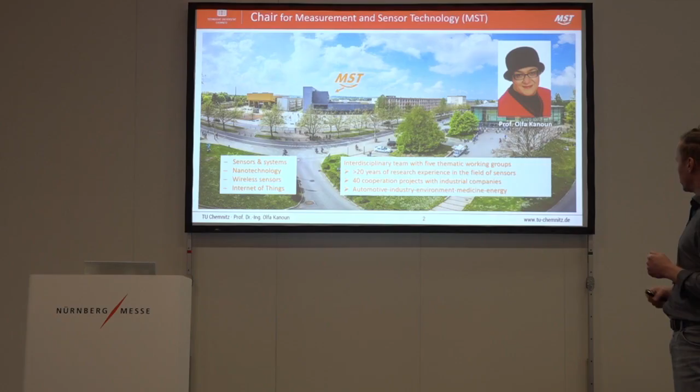But we always ask the question, how do you do it in detail? They spoke about software, they spoke about AI and so on, but which information do they use? And the answer always comes, I don't know. Our idea is to look into our capabilities. We are a university in Chemnitz, my chief is Professor Kanoun. We are dealing in the field of measurement and sensor technology, and we ask ourselves what we can contribute with our ideas and techniques to improve production processes in the sense of sustainability.

A short recap, we have 5 main working groups in our team, dealing with almost all aspects common in sensor technology. I want to speak about impedance spectroscopy, that's why no more details here. We are developing physical sensors, wireless sensor systems, electrochemical sensors, and if we combine everything, we are in the range of smart wearables. The covering technology is impedance spectroscopy, and in all these fields this measurement technique is more or less involved.

This is also the measurement technique for which we have hosted the International Workshop on Impedance Spectroscopy in Chemnitz for nearly 20 years now. This year we have the 18th run of this workshop. Okay.

Sustainability in manufacturing. I'm sure you are familiar with this background, the sustainable development goals provided by the United Nations. If we cut it down to the requirements of companies, we have intrinsic and extrinsic motivations. The intrinsic motivations are the scarcity of resources and energy, and energy is in most cases the question. Cost reduction, increasing quality, less rejects, supply chain problems, circular economy.

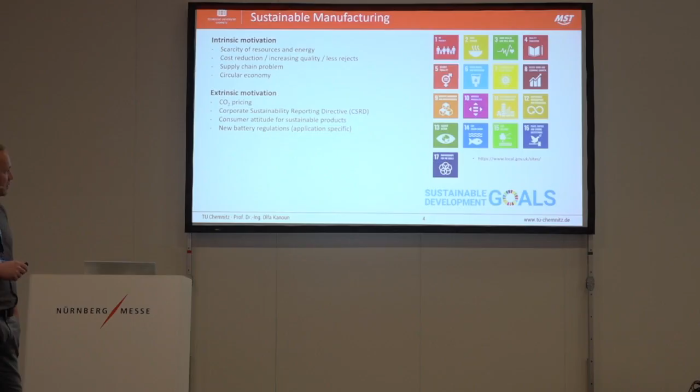Extrinsic ones, I don't want to go into each aspect in detail. I want to highlight the Corporate Sustainability Reporting Directive, the CSRD. This is a demand from the European Commission which causes more reporting in the future. We have a lot of reporting already, but this demand will come, and in a lot of cases the companies don't have measures in hand for this requirement. Focus: CO2 footprint optimization, energy and resource utilization. This is the motivation we were looking for.

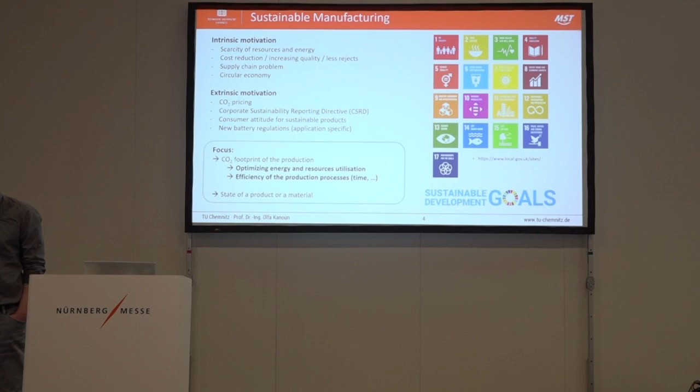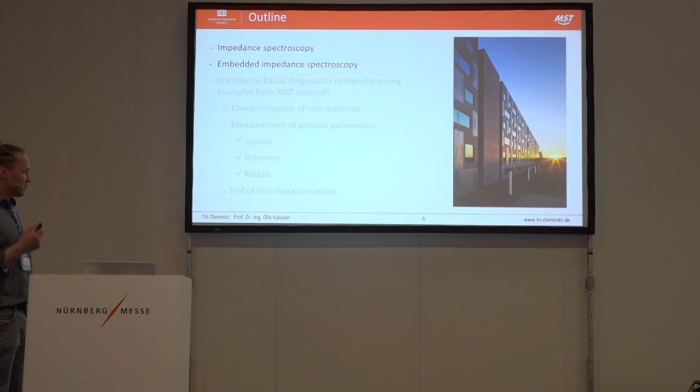And the question now is impedance spectroscopy: how can we contribute to support this process, to generate new or not accessible information in the production process to improve sustainability at all? And now, I'm sorry, I need a little bit of theory. I need to explain impedance spectroscopy a little. So I have some slides here, and I want to make it short.

Impedance spectroscopy is something from the field of system testing. I have an excitation signal. I apply this excitation signal to any kind of device under test. I get the output, I crunch both pieces of information, and I have a curve of the system, a UI curve.

The excitation signal is, in most cases in the theory, a sinusoidal signal with a certain frequency. We apply it in a working point, we get a response, and the output is at the end in this so-called Nyquist diagram, real part and imaginary part, one frequency point. This one, if I use one frequency.

Now we take care of this spectroscopy aspect. We are using multiple frequencies. I have multiple frequencies, I have multiple responses, and at the end such a characteristic curve, the so-called impedance spectrum, is born in this so-called Nyquist diagram.

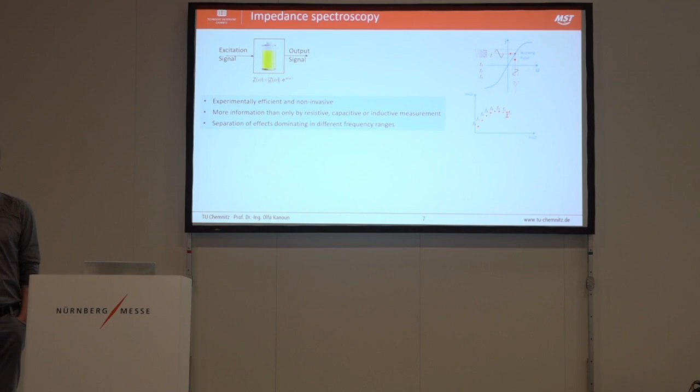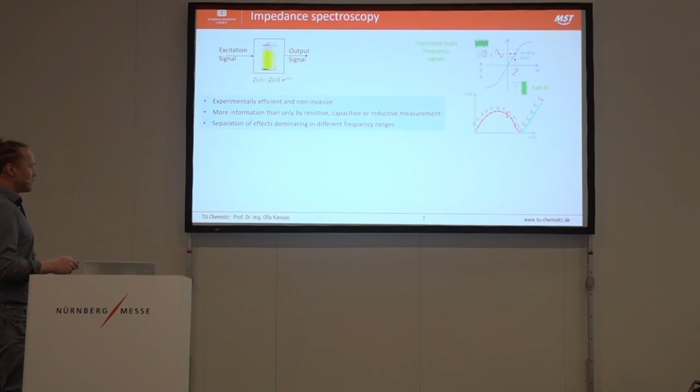And we can go also for the inductive one with coils. And this is, in our understanding, the inductive spectroscopy. So we have a huge palette of instruments for a lot of fancy things. Non-invasive, we can go resistive, capacitive, or inductive. And what is the strength of the approach? The separation of effects because of the frequency response. Later more.

At the end, we're dealing with this approach in a couple of different application fields, and I explain it always in that way, that everything that is surrounding us, this material, the air, this floor, or even a technical system has an electrical fingerprint, and this is this particular impedance characteristic. And we develop a method to analyze this fingerprint and to bring it out from the laboratory.

Impedance analyzers, maybe some of you are in charge, are costly devices, several 10,000 euros, and it is an approach in the lab. We need to transfer it to an embedded system to get it in a real-time process, in a production process. Okay.

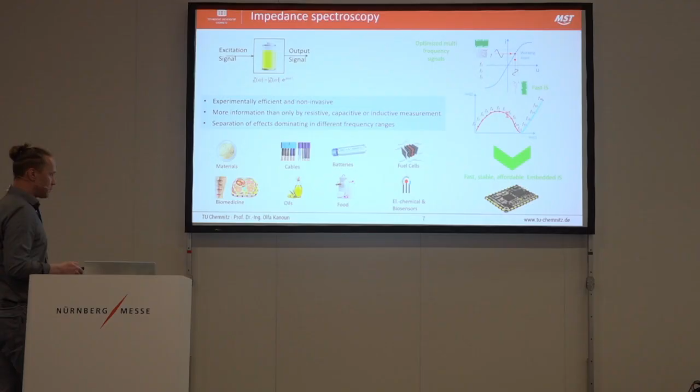Separation of effects. Now you see here also a theoretical impedance spectrum. It looks like a spectrum from a lithium-ion cell, and you see here different branches, and you see also frequency ranges. You see here millihertz and here kilohertz. This is the specific frequency range we need to apply for especially this application, for this battery system.

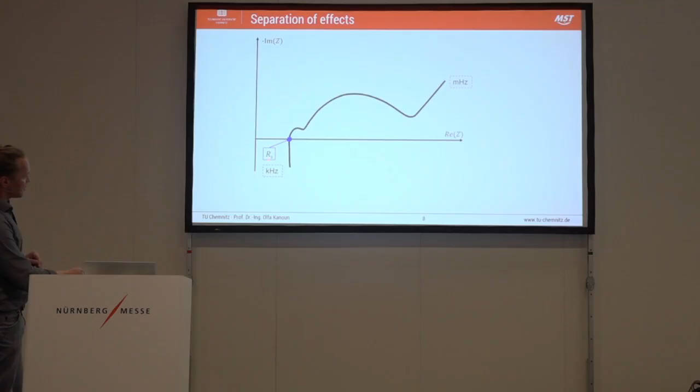And then separation of effects. We have here the so-called RS point. Not so really important. It is state of the art in the battery diagnosis, but really without any sense. Then you have here the so-called diffusion part. This is this almost linear line, and in this frequency range we describe electrochemical characteristics.

So you need to understand, if we go for millihertz, there is taking place a certain polarization of the huge molecules in the electrolyte. If you increase the frequency, the heavy weight of the molecule is too huge, and this part is going out of the signal that we measure, and another effect becomes dominant. And this is exactly this curve.

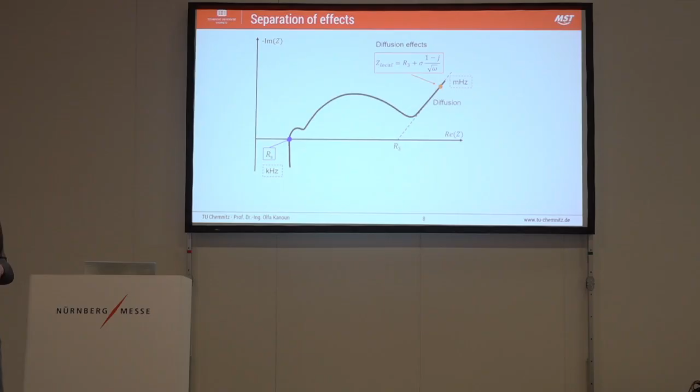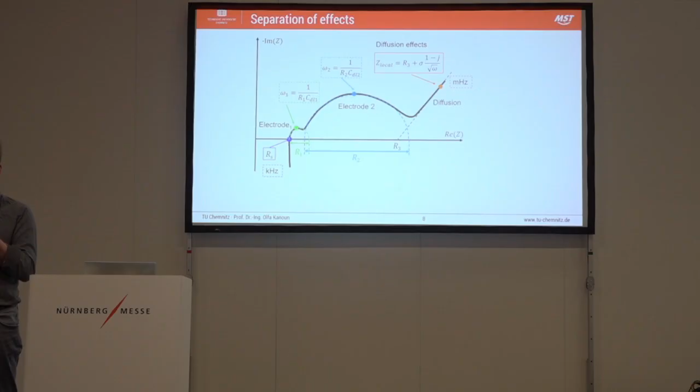The frequency reaches this point, the polarization of the molecules does not take place anymore, and then this curve occurs. This is the so-called electrode 2, and in these frequency ranges we can characterize the lamination of the electrodes, for example. So, I don't want to go so deep in detail, but this should illustrate we can choose a frequency range, and we can decide by choosing this frequency which effect we determine.

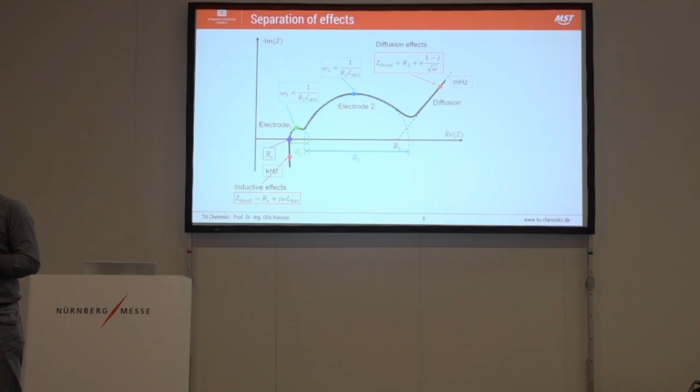And if you go in this range, we can take a look to the electrode 2, to the electrode 1, and here we have a small inductive part which we can use also to measure temperature inside of the battery cell. Okay. All these parts of the curve are well describable, and we call it a physical model, and this is always our understanding. We try to reach a physical model of our device under test.

We want to understand what is the reason for this behavior, and this is our most transparent example for this reason. I have here another German sentence. We have a qualitative and a quantitative analysis. For the qualitative one, we simply evaluate changes in the curve, and this is at the end the most simple approach. We measure the impedance spectrum at time x and the impedance spectrum at time y, and then we take a look, is there any kind of a change, without any understanding why?

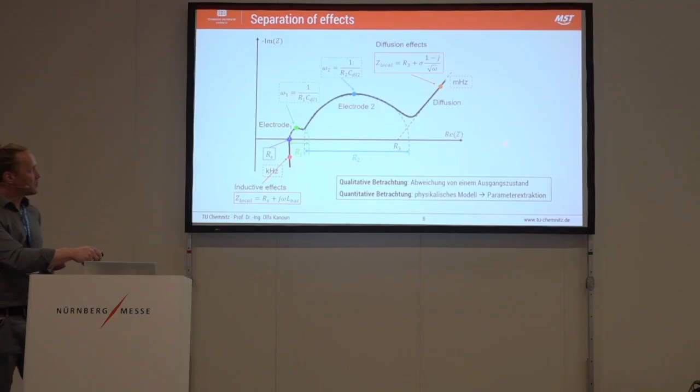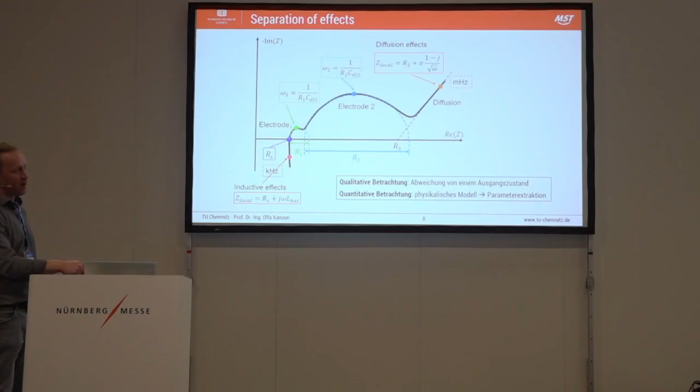The quantitative approach is exactly what you see here. We ask ourselves, what is the reason, or what is the physical or the electrochemical background of exactly this behavior? And then we have a physical model, and with this physical model, we can measure real physical quantities. So this is quick and dirty, and here we need a lot of time effort in our lab.

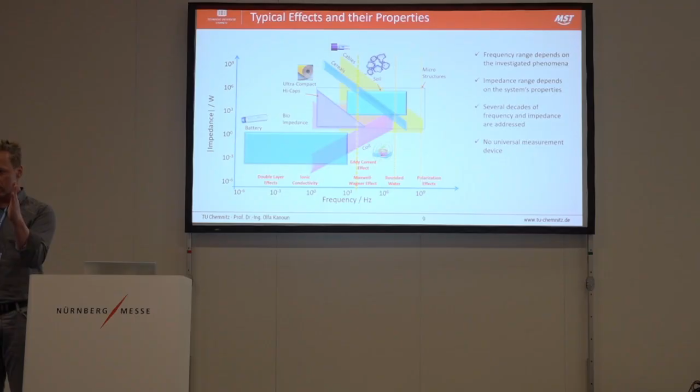So, what I was explaining now, you can see here on this slide. This is, let me say, the greatest IP of our chair. We asked ourselves, what happens between the electrodes when we make the impedance measurement? And what you can see here, for example, this is the battery again. You see here on the x-axis the frequency range from 10⁻⁶ to 10⁹, and here 10⁻⁶ to 10⁹. So this is a range of, let me say, theoretical impedances overall.

And over time, over our research, we developed this diagram showing which physical effects or characteristics take place at which frequency. And you see here the battery. It is in a low frequency range because the effects, the phenomena, are slow. And you know also, if you measure a battery, you speak about ohms, you speak about milliohms.

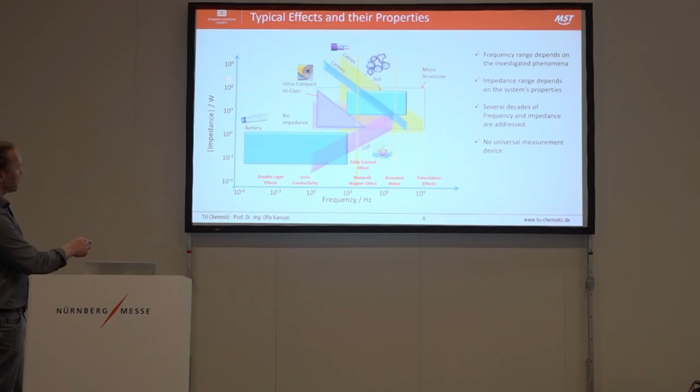If you go for soil, for example, you have much higher impedances, almost an isolator. And in that case, we need to increase the frequency. Then we need to go into the kilohertz, megahertz range. Right now, we want to continue with polarization effects in polymers. There we also need the gigahertz range. So, what else can you see here? The battery in this range, and here, for example, bound water.

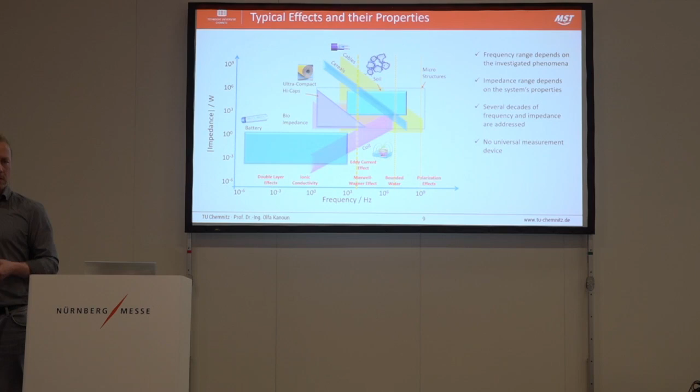I'm sure all of you have a microwave at home. What does a microwave do? Agitation of water molecules. And that's why everything that is somehow related to water, we agitate in this frequency range. If you speak about humidity in soil, humidity in wood, or whatever, we need exactly this range as the agitation signal. So, this is our methodology.

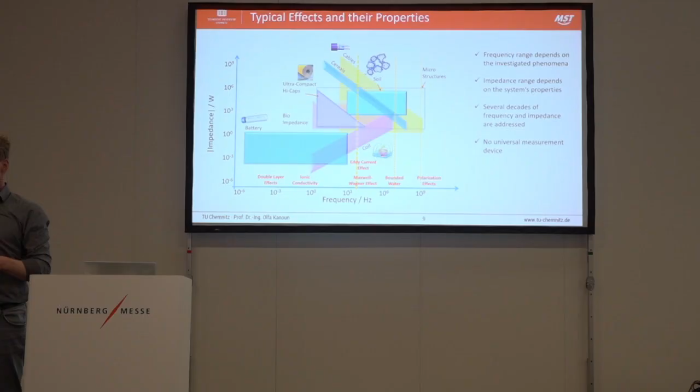We take a look at the device under test. I had a talk here with a colleague. He wants to know the aging process of a sensor. So I can't give a number, but if I understood what the aging process is in detail, which phenomenon is, maybe saturation of water in the substrate material, then I can define, okay, to analyze the aging of the sensor, I need a frequency like this. If I have a contribution of an electrolyte or electrochemical system, then I need to go down with the frequency.

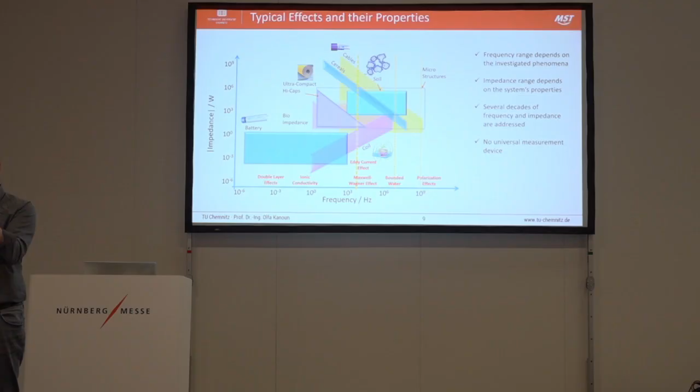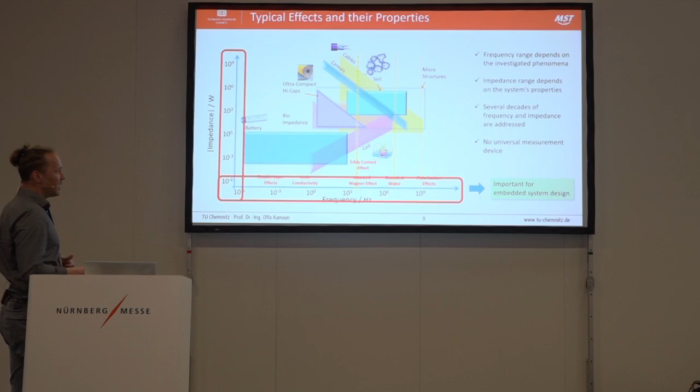And so this is our development process: we need to take a look at the device under test, at the question which is asked, and then we design exactly the required parameters for our embedded system design. To make it short, impedance spectroscopy is a measurement method in analytic labs. These are huge devices. You need to pay many thousands of euros. But our strength, our goal, is to bring it into a small electronic system, robust, fully automated, and also with limited resources. And how is it possible?

Let me say, it's a process. First of all, for sure, we need to understand the problem in the lab. Then, in the next step, we look for representative frequencies which help us generate the needed information. And at the end, maybe I need 2 or 3 frequency points which are sufficient to give me this answer. And with this little step, it is possible to reduce from this broad spectral analysis with a lot of data and a lot of measurement time to a small and tiny system which can be embedded in a process.

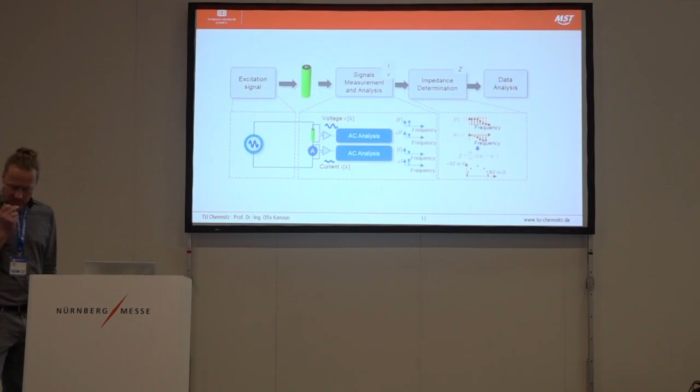In the meantime, we also have some references. We have a project with a company to detect counterfeit coins. And there we realized a system integrated into a system, and we can detect 500 coins per minute, in real time. Okay, here I guess is the last theoretical slide. Sorry for that, but it is important to understand the needed steps.

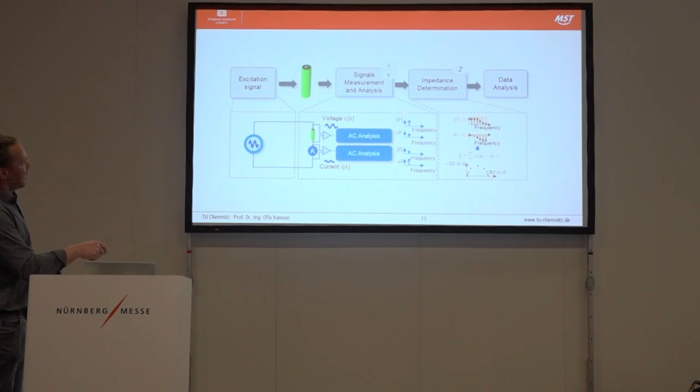As I said in the beginning, we need the excitation signal. So we need to design exactly this spectral information. We need to apply it to our device under test. Then we need to measure voltage and current. We need both. And here is also the problem: we need it in parallel. Because of phase shift, it's not possible to multiplex it to measure voltage and current. In the worst case, it works, but it's better if you can measure it really in parallel. And then we have the impedance determination and at the end the data analysis. Up until this point, it is hardware, and from here it is advanced signal processing. Okay.

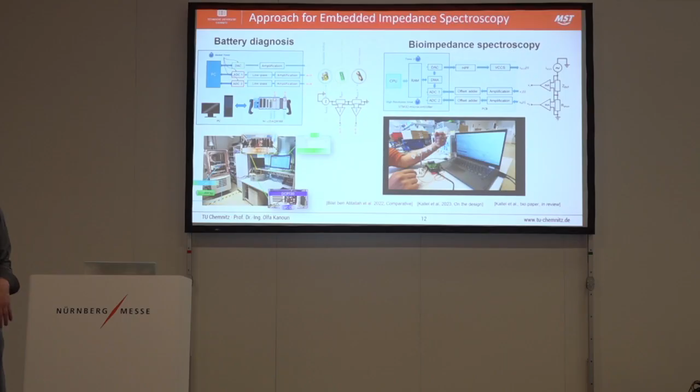Yes, we did it in a lot of different application fields. As I said, here you see our impedance battery lab with a climate chamber and our hardware. We do it also at the human body in bio and biomedical application fields. Only to give you an idea, we are dealing in a lot of different application fields.

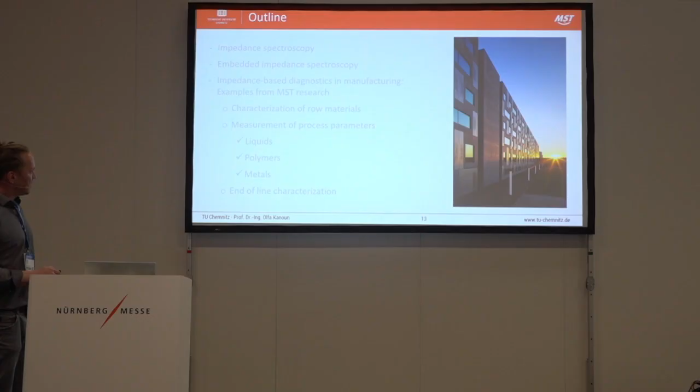But now, impedance-based diagnostics in manufacturing processes. So I need to hurry up a little bit. We have been dealing for maybe 20 years in this field, impedance spectroscopy. We are developing a lot of projects in this field. And some years ago, we asked ourselves where we are and what we want in the future.

Such an internal procedure, and we found out that we are dealing with almost all physical domains you need also in a production process. So this is an artificial one, yeah, for sure, here is not a real production process in the background, but what are included? Incoming goods. You have always in a production process things which are coming in.

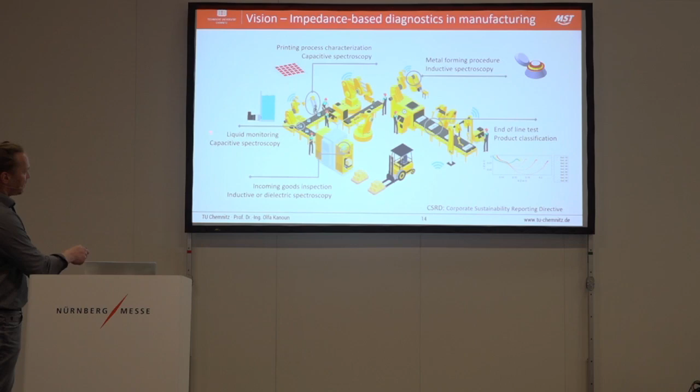You have to deal with liquids. If it is a color, a process water, or a jam, or in the food branch, whatever, milk. You have liquids. You have polymers. In a lot of companies, you have to deal with polymers. We have metal forming processes, combination processes, and at the end, you have end-of-line tests. This is so far our classification of typical branches.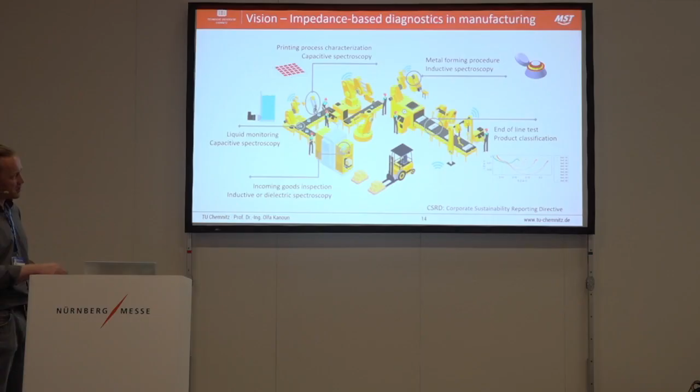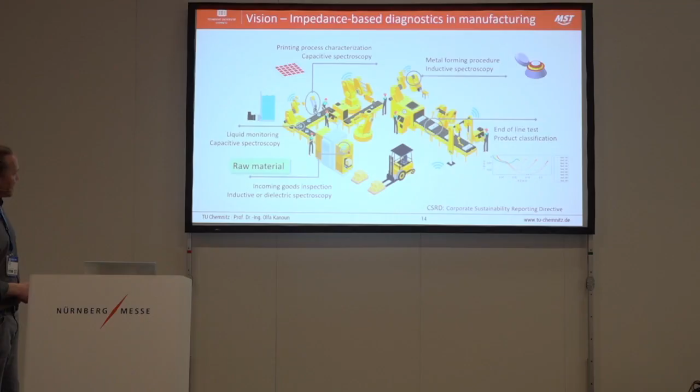And here it is written down. You need the CSRD, the Corporate Sustainability Reporting Directive. You need to explain, hello, I work on an almost CO2 reduced level. So now we go through the steps: raw material, liquids, polymers, metals, and products. And we start here in the incoming goods. So, sure, we are now a little bit in the future. And in the future,

if you take a look in the research, the question of recycling becomes more and more concrete. I don't want to speak about our automotive branch. They are really in charge of this, because until now, each exported car counts as 100% recycled. I don't speak more. They really have an issue now. So recycling becomes more and more an issue.

Also, supply chain. You see the problems with Corona. The supply chains don't exist. So maybe you need a second or a third supplier for your products. That means tolerances. Until now, you were a company and you say to your supplier, hello, I need this and this raw material within these tolerances. And if you cannot, then I go to another.

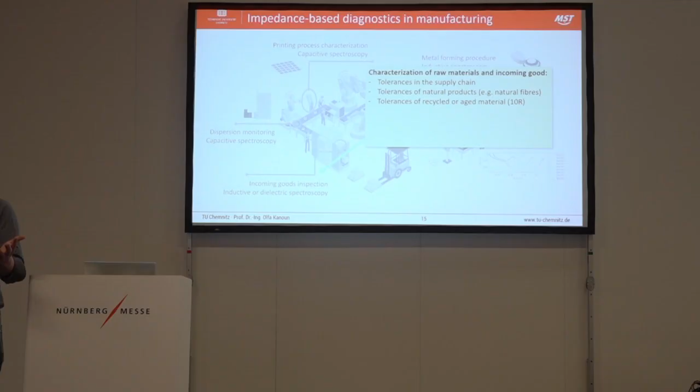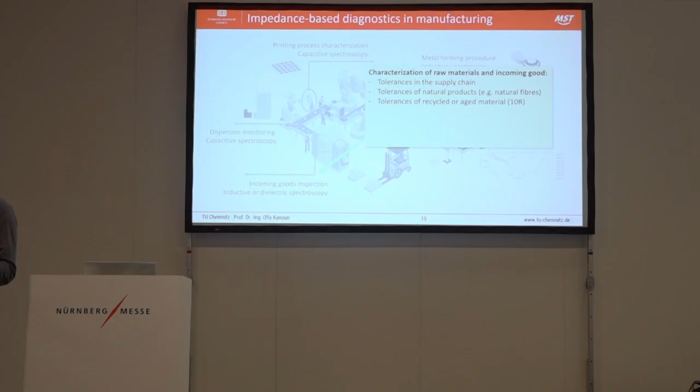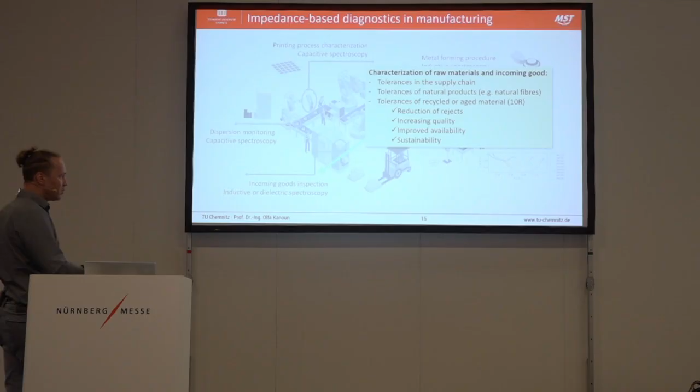But if we speak about recycling of material, you can't guarantee these tolerances anymore. Also, if you go for natural products, we are dealing in our team also with palm fibers, you don't have such strict tolerances anymore. So you need to deal with it. So even at this point in the incoming goods, you need more information. It will come. For controlling, reduction of rejects, increased quality, improved availability, sustainability at all. So you define in the beginning your process parameters.

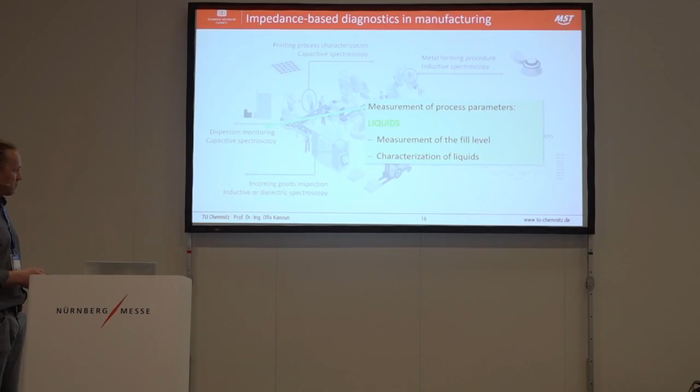Okay, let's go on. Liquids. You have fill levels. You have quality of your dispersions. You have sedimentation of particles, or you have evaporation processes in a tank or something like that. It's a problem, until now difficult to observe. We have here an example. It is from some years ago. It was a PhD in our team.

We have here a simple proximity sensor with a capacitive principle. And there's a tank with a viscous medium. So what is the problem? In this tank, is it the real level, or is it a conductive film at the wall? With a standard capacitive proximity sensor, you don't get this answer. We simply apply a few more frequencies, and we can distinguish between this conductive film and the real medium. Only as an example. If you are interested, we can discuss later.

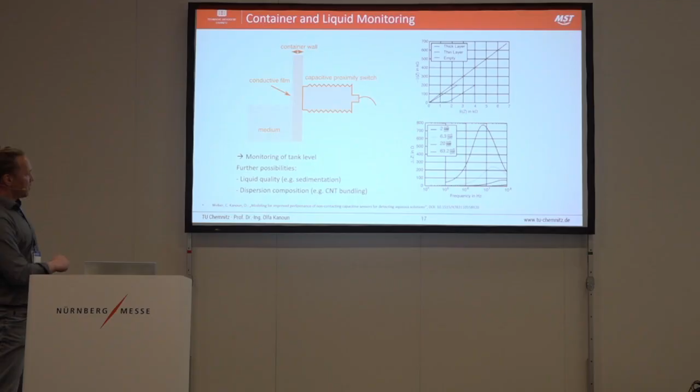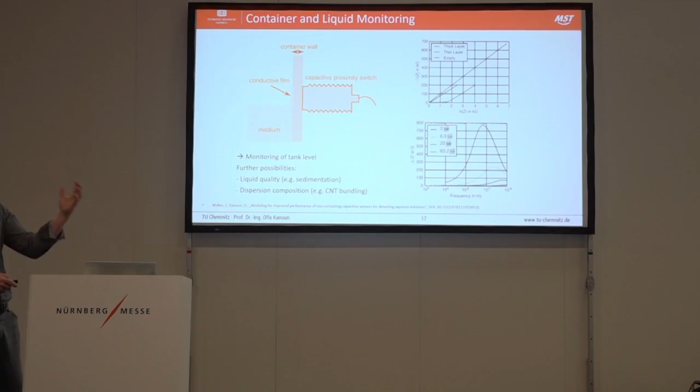Monitoring of tank level. Further possibilities. We also did liquid quality. We measure ion concentration in water. And for example, dispersion composition. Maybe someone knows us, we are developing also polymer sensors. We are dealing with CNT dispersions. We characterize our CNT dispersions also with impedance spectroscopy. There are a lot of applications and questions which we can solve with impedance spectroscopy, simply with this multispectral approach. We continue with the polymers. Wow.

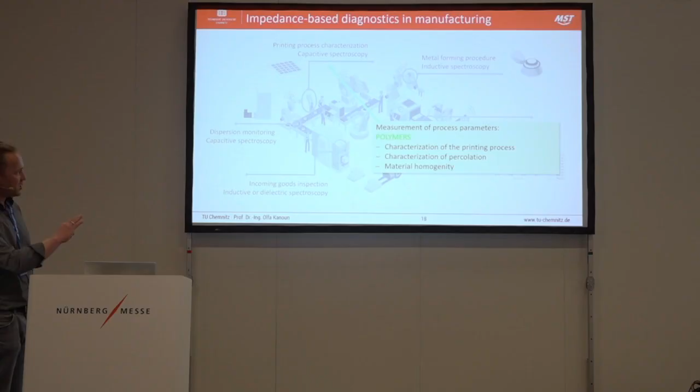Characterization of printing process. This is my chosen application for now. Characterization of percolation, material homogeneity. So my approach, which I have chosen for this presentation, is a printing process. We have a company in Chemnitz.

I'm sorry, I need to accelerate a little bit.

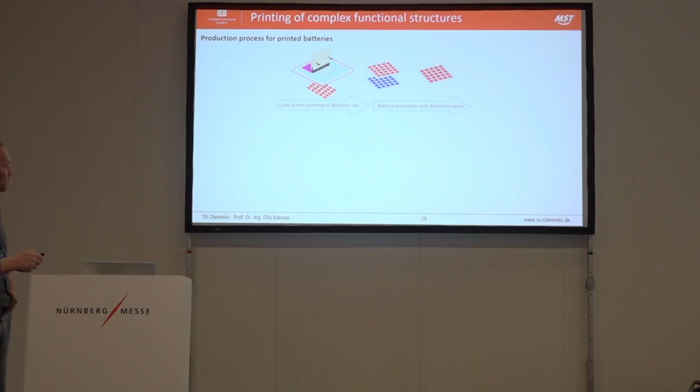They want to print batteries. A printed battery is a multi-layer system. And honestly spoken, I am sure that even with the first layer, you define if this battery becomes a battery or not. Quality. So our possibility is to measure each of these production steps with a capacitive structure. We measure in our laboratory the so-called golden sample. We have an ideal product, and we measure the electrical characteristic from this golden sample.

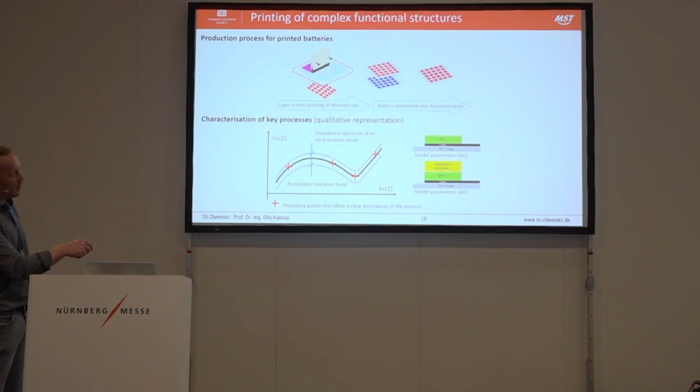Later on, we can go into the production process, even in this huge matrix with a lot of points, and we compare at the end the impedance spectra with the golden sample. So this is quickly done. This gray curve is a tolerance band around the ideal curve, which is maybe acceptable. Then we have the second printing step. This is this yellow layer.

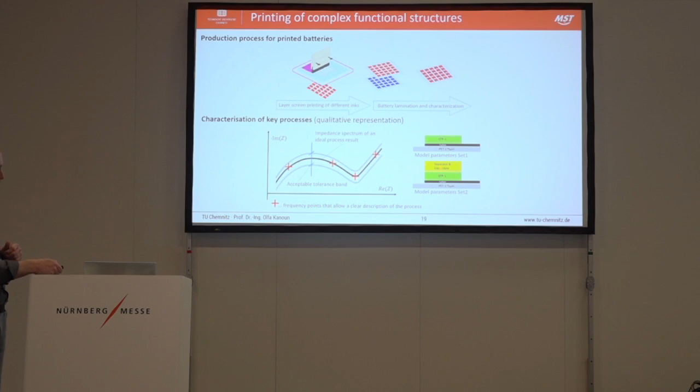What do we need? Nothing else. We have, again, our capacitive structure. The only change is in the microcontroller, the model: other model parameters for the double layer system. And also here, we have the ideal example, the golden sample from our lab, and we compare it with the result. At the end, we have a matrix analysis. We have also approaches for this. And we can generate from this matrix IO, IO, NIO.

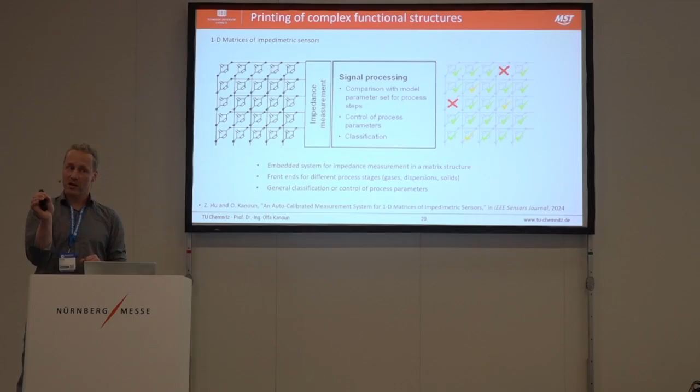And maybe here the yellow one, the process parameter should be adjusted, a little bit more heat, a little bit more oxygen, whatever, for the next production step to get it back. State of the art is that this complete matrix will be processed from the beginning to the end, and at the end you make an end-of-line test, and you find that you have a lot of waste. So this is, from our understanding, a huge contribution to improve the sustainability in printing processes. We continue.

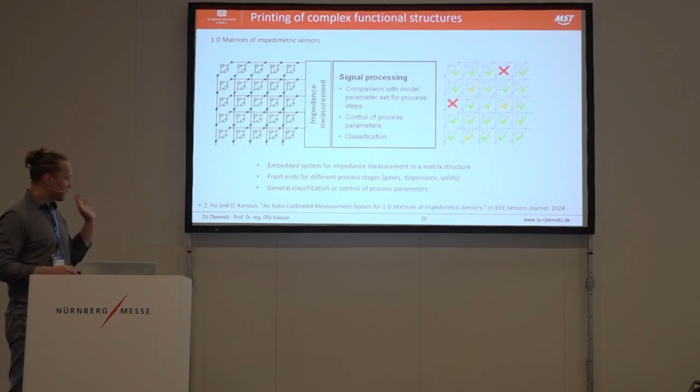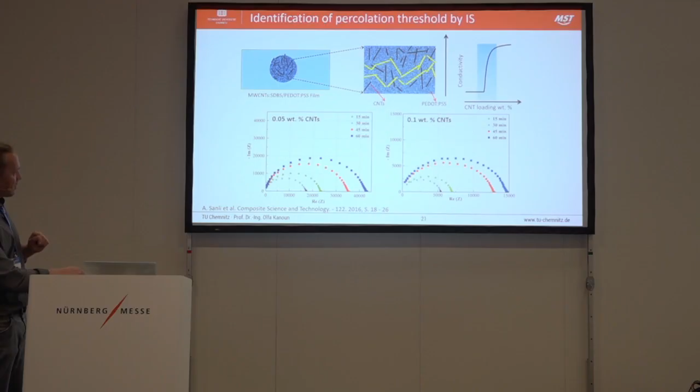Percolation. This is, for example, our approach for polymer sensors. We have a polymer substrate, and inside we mix carbon nanotubes. We use also the impedance spectroscopy to characterize this drying process, which you can see here. We can follow this procedure to optimize it. I go further because time is almost done.

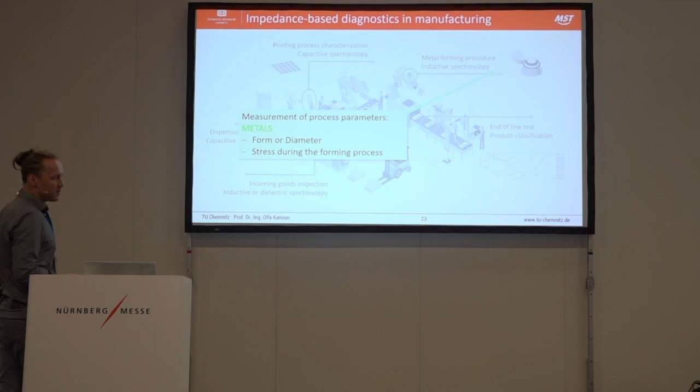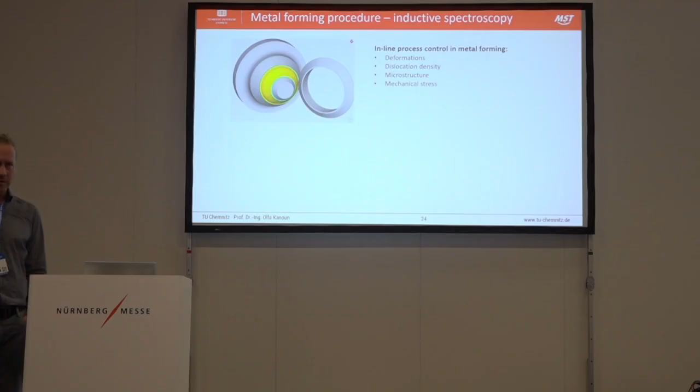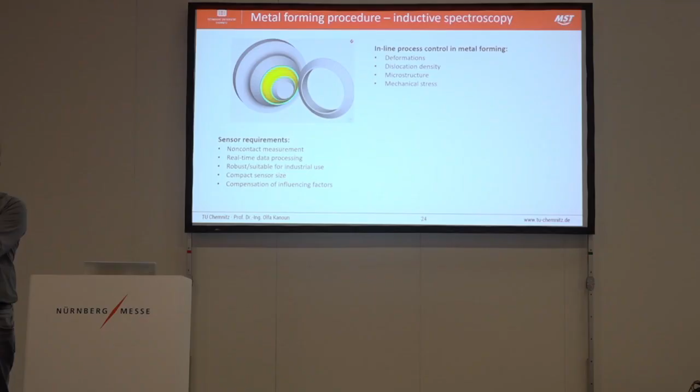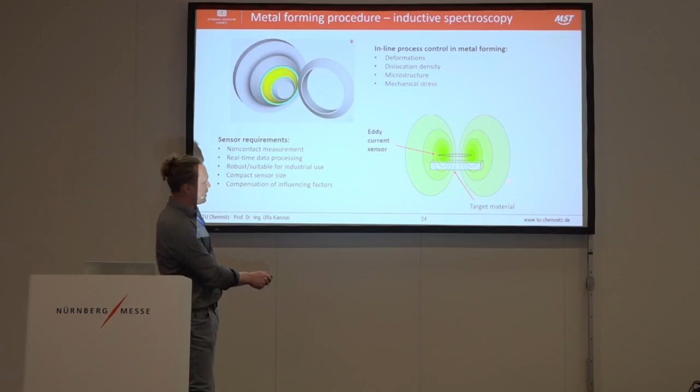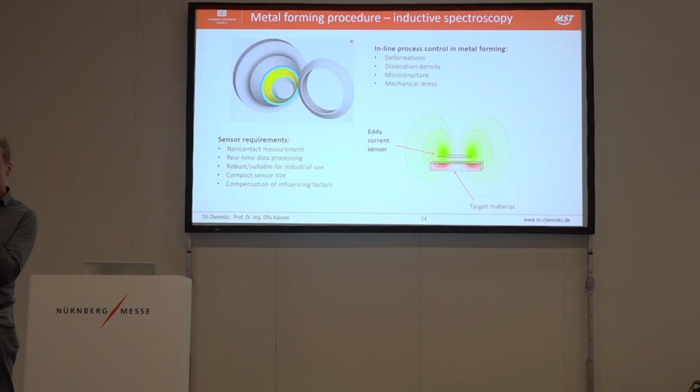And what can we do? We have a coil, and we need to come within 5 millimeters of the system. It can rotate. It can be hot, more than 1,000 degrees. And then we can measure our impedance spectrum. Here, quickly, the eddy current. We have a coil, and in this coil we put our multispectral information. The relevant phenomenon is the so-called skin effect. If you have a high frequency, the eddy current is scratching on the top. If you have a low frequency, the eddy current goes deep into the material. And so we can look inside the material without destroying it.

So this is our current approach. It's the so-called MST flower. MST is our shortcut, and the flower is the main coil and some surrounding coils. With this, we can measure anisotropies, and I want to highlight the permeability of the material. Now we need to ask which phenomena cause a change in the permeability, like stress, torque, grain size, temperature. All these parameters cause a change of permeability, and we can measure it without touching or destroying the material, because of our multispectral approach.

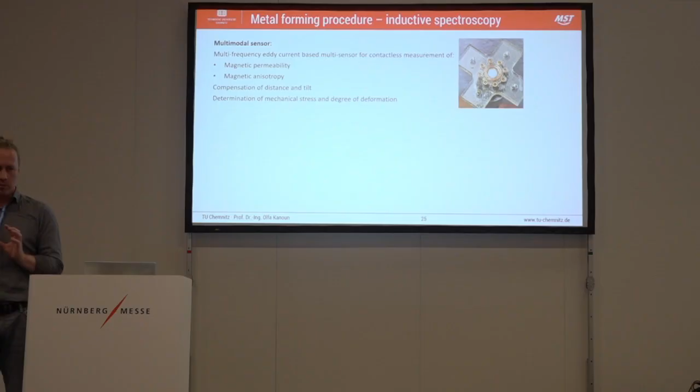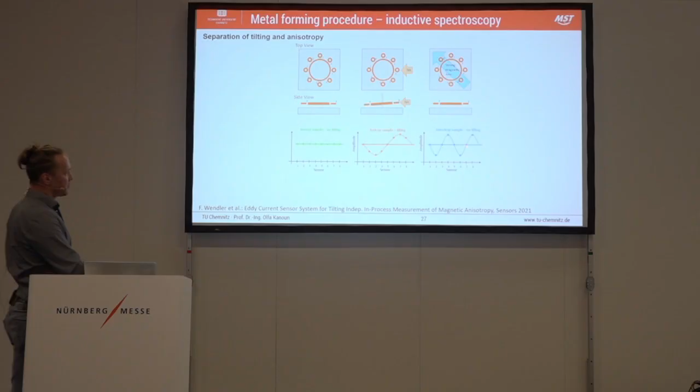I can explain the aspects, but I don't have time. What is important: if you have a coil, an eddy current sensor, we have a so-called tilting phenomenon. If we have a disbalancing of the sensor, because of this multi-coil approach, we are able to compensate such a tilting effect. And something else, we can also measure flux. Flux of a magnetic field we can also detect with this sensor.

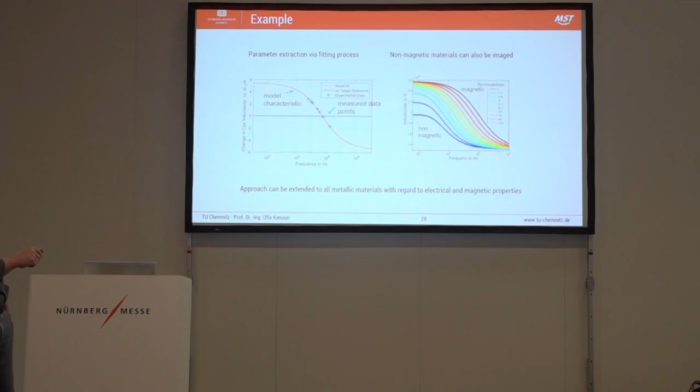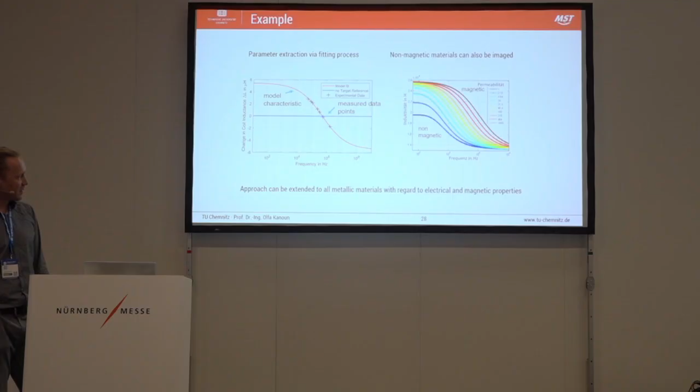This is an experiment where we detect with our system different material types. Here you see a theoretical model, and here points from real measurements. I don't want to go into too much detail, but here you see curves of non-magnetic and magnetic material depending on different frequencies.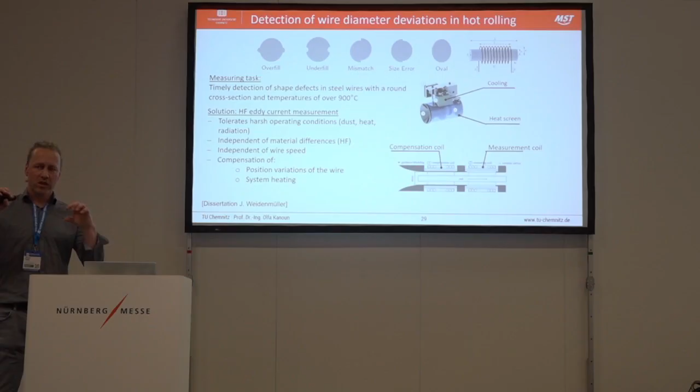This is really a harsh environment. Our approach uses inductive spectroscopy to detect such errors, which can be used to adjust process parameters to reduce this failure. Okay, then end-of-line testing.

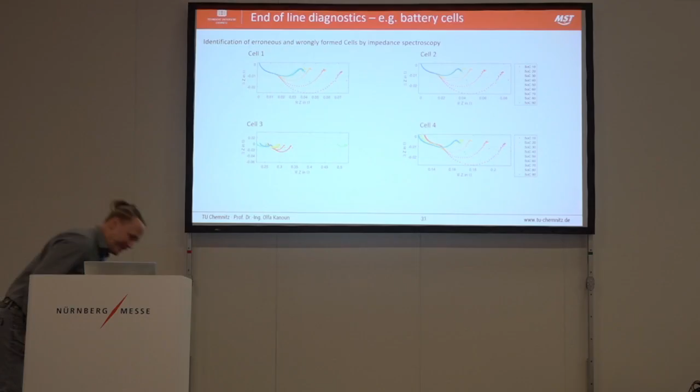It's the last presentation, so I'll take the liberty. End-of-line testing: here I want to speak about our battery diagnosis. The battery is maybe a product at the end-of-line of production, and here you see a comparison of four cells of the same type. What did we do? We measure an impedance spectra at these SOC stages.

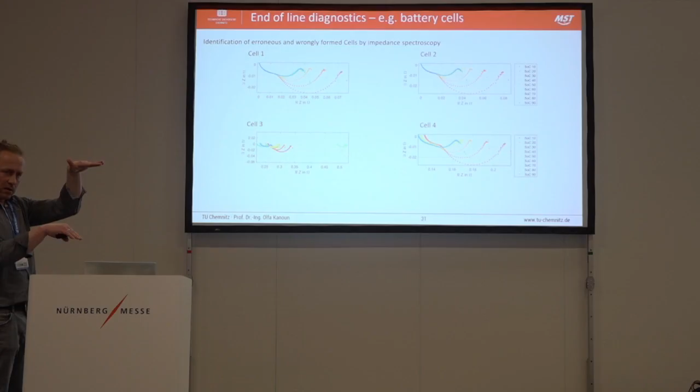What is the procedure? We charge the battery fully, we discharge to evaluate the complete SOC range. Then at each 10% we measure the impedance spectra. We see here cell 1, 2, and 4 are almost similar, and cell 3 has a shift, especially at the 70% SOC point.

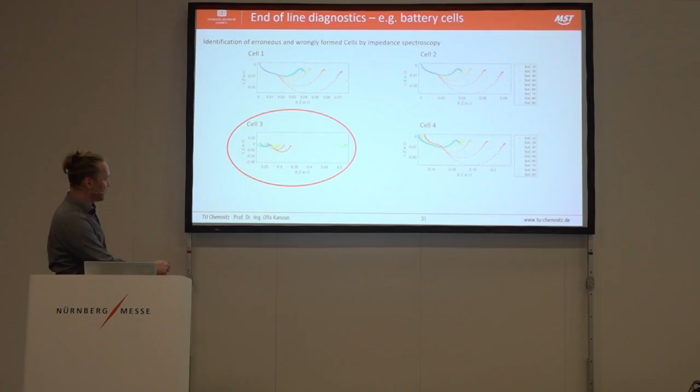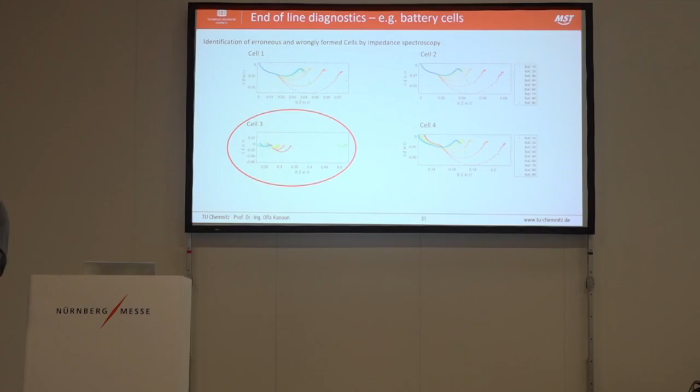You might ask yourself, does it matter? But if you take a look here, this is the real part, and the real part is causing heat losses. That means this cell has double the heat loss compared to all the other cells in the stack, and this can become critical — we have a source for a hotspot, and a hotspot in the battery system is almost critical.

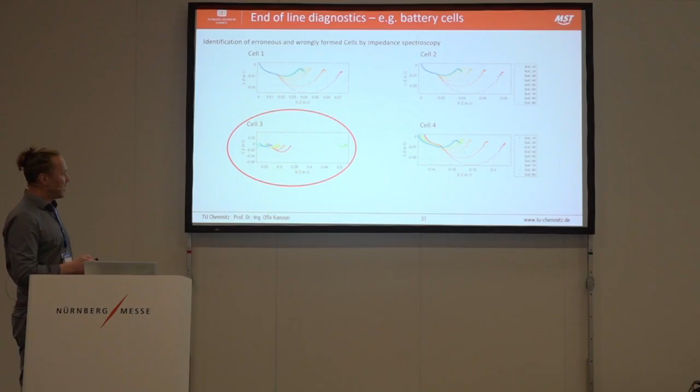So this is an end-of-line test for systems, and we are dealing with almost all battery types. Here you see the characteristic curve of a Li-ion battery. In our understanding, lead-acid batteries will also have a story to tell in the future as well.

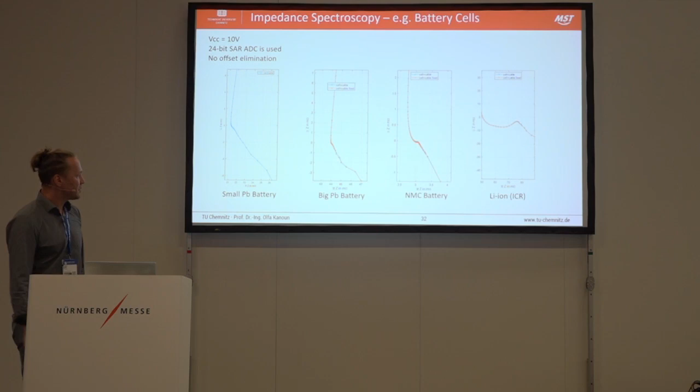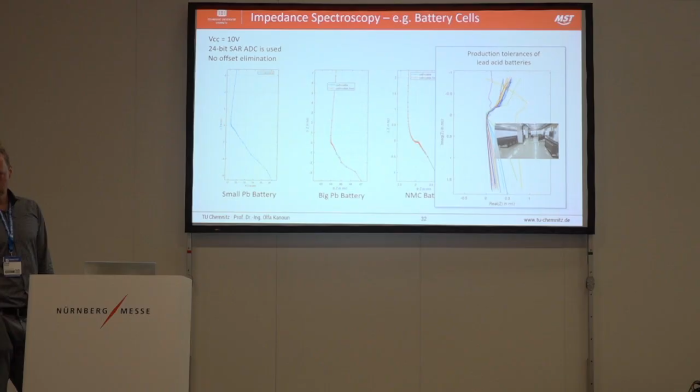In all these models and measurements you have characteristic elements, and we use this. This is a storage system at our university, and on a regular basis we go there and make measurements, where we can also play a bit with our methods.

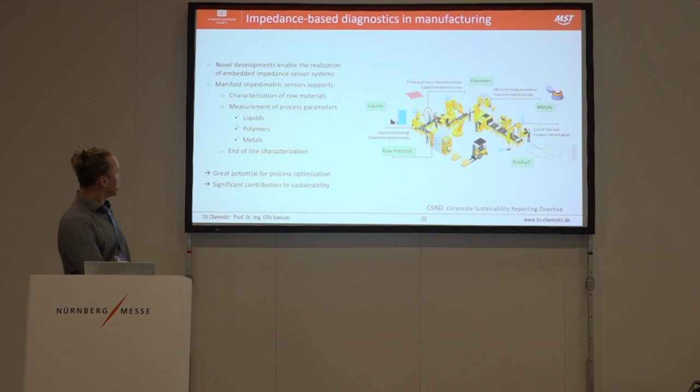Okay, so I am at the end. What was my idea? To illustrate a scenario of how we can support a sustainable production process in the future by means of using impedance spectroscopy. Here once again is the production plant illustrated, and yeah, it is a new approach — we can generate information inside a process which does not exist until now, really. So this is something that needs to get into the minds of companies, and that's why I am here.

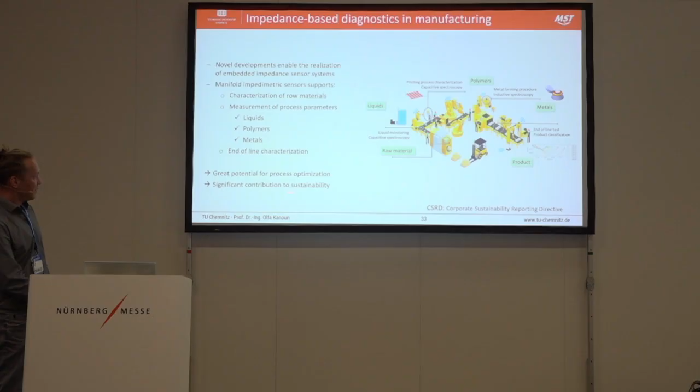We have a lot of different disciplines we can deal with. We are in the medical branch, we can work with polymers, metal, food, agriculture, and we see huge potential in this method. One important step is to reach the level of bringing it into an embedded system, and this was really the need to get out of the laboratory.